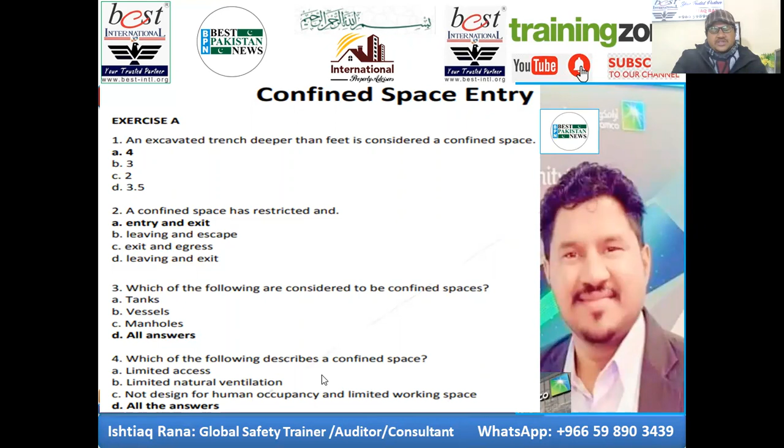Now, which of the following describes a confined space? That is the question. Limited access, limited natural ventilation, not designed for human occupancy, and limited working space. So all of the answers are correct.

Now, the atmosphere of a confined space is unacceptable if the oxygen level is below a certain percent. As per Saudi Aramco, below 20% or above 23.5%. So the normal range is 20 to 23.5%. The atmosphere of a confined space is unacceptable if oxygen is below that percentage or above that percentage.

So below 20% as per Saudi Aramco, but as per OSHA 19.5%. On the other side, as per Saudi Aramco, above 23.5% and less than 20% is not acceptable. If we still want to work, above 23.5% is not allowed because explosion and fire hazard will be there. Below 20%, of course, suffocation and chances of unconsciousness will be much higher. So it's not allowed, because oxygen is life, right? But yes, if you have certain permissions, with SCBA or self-contained breathing apparatus, or supplied air breathing apparatus, we can still work, but it requires plenty of approvals from Saudi Aramco.

Now, which of the following hazards can be found in confined spaces? There are plenty of hazards in confined spaces, but some of them are listed in the options, like temperature - I would say extreme temperature, or maybe low temperature below 0 degrees - or noise, or hazardous atmosphere. All the answers, because all three are the hazards.

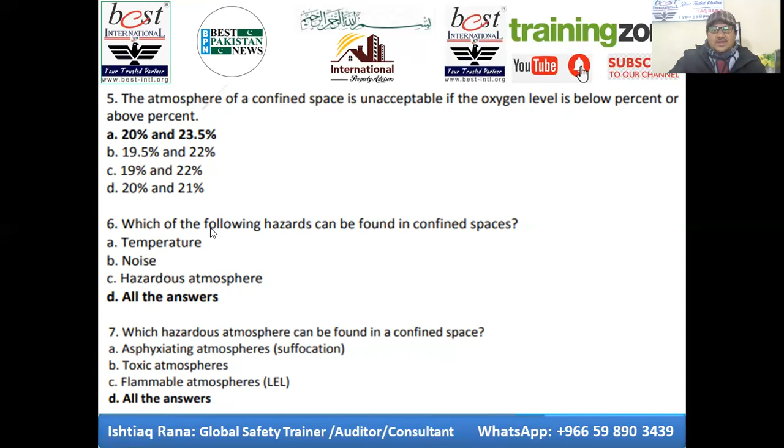And unfortunately, sometimes we don't get a second chance. That is why we have to be proactive, very, very much proactive, rather than reactive - waiting for something to happen and then taking action. Don't wait for the accidents.

Now, number 8: exhaust, diesel, or petrol fumes near a confined space may contain a hazard for a nearby confined space, of course, carbon monoxide. The air temperature in a confined space is not considered when evaluating working conditions in a confined space - false. We have to consider air temperature.

Exercise B is all about what you must have before entering a confined space within a Saudi Aramco facility or project site. You are required to have a valid confined space entry permit issued by a certified issuer, like you will be, inshallah, after passing the third-party exam and then the Aramco exam. You'll become a certified work permit receiver, and qualified work permit receiver, and then along with the Saudi Aramco issuer, you as a work permit receiver can represent your company, and both parties have to sign the permit, which I call a kind of legal agreement.

So both parties are responsible for safety. It's not like only you as a contractor are responsible. Even Saudi Aramco as a customer, they are more responsible than us, to be very honest, because we are going there to serve them, maybe for maintenance, inspection, repair, or construction projects, but ultimately we are working within their territory. So their responsibility is also there, that is why they have plenty of safety policies and procedures, with a lot of focus on safety all the time, and they motivate us to follow safety regulations.

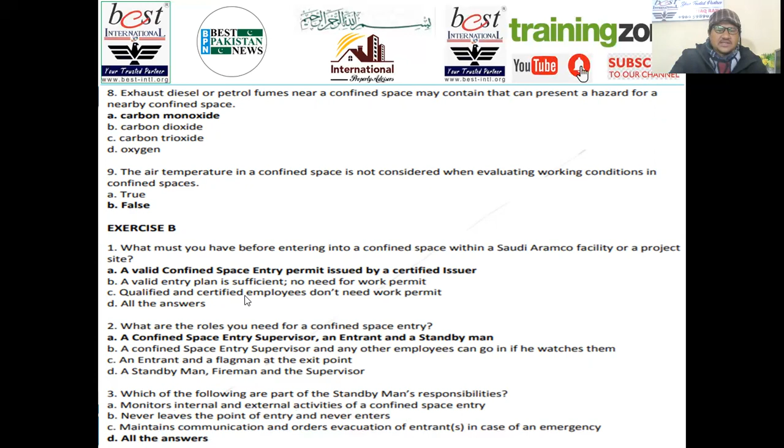Question number 4 of exercise B is, which of the following are part of the entrant's responsibilities? Again, never enter until precautions are in place, maintain communication, and alert the standby man or other entrants in case of emergency.

So all the answers are correct. Now, exercise C is more like true and false. A confined space entry permit is required for jobs when you enter a confined space - true. Vessel entry for cleaning activities in a hydrocarbon processing plant requires a confined space entry - true, because it's a restricted area, danger zone, or kind of hazardous area.

So whenever you are crossing a line of fire, of course you require a permit. Even the person who already has the permit still has to be careful of another line of fire, because the smallest mistake is all it takes, and plenty of incidents have happened and are still happening, to be very honest. You can research the last 100 years and see how many incidents or accidents have happened within restricted areas, danger zones, or especially confined space areas.

Now, a confined space entry permit ensures the proper preparation of the confined space, identification and control of hazards, the safe entry and exit of personnel, and that rescue plans are in place - true. We need all these sets of programs, documentation, and systems to be safe there.

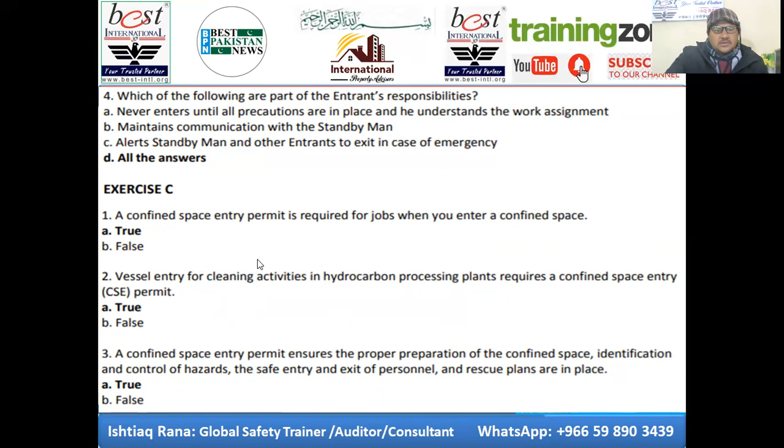Now, the confined space entry plan is the written document to isolate, depressurize, clean, drain, purge, or ventilate. So the confined space entry plan is a written program on how to disconnect all sorts of energies, depressurize all sorts of pressures - could be hydraulic, pneumatic - or cleaning, maybe water cleaning, maybe a steaming process, and draining all hazardous materials and liquids.

Purging might use nitrogen for purging, and ventilate might be natural ventilation or mechanical ventilation using a blower, or even continuous ventilation while performing any activity there. But especially when performing emergency rescue unique to a specific confined space, yes, we require procedures. So it's a game of procedures. The right option is A.

Now, during the joint site inspection, all hazards and controls are identified and recorded on the work permit form and become conditions for the confined space entry. True.

During the joint site inspection, all hazards and controls are identified. So JSI is not kind of a formality. We truly need to take it seriously, especially I'm talking to the already approved, qualified, and operationally working within Saudi Aramco, the WPRs. Please take this JSI seriously, because that is the first, single most important document where you can ensure your safety. Don't rely 100% only on Aramco safety, because your safety must be your top priority as well.

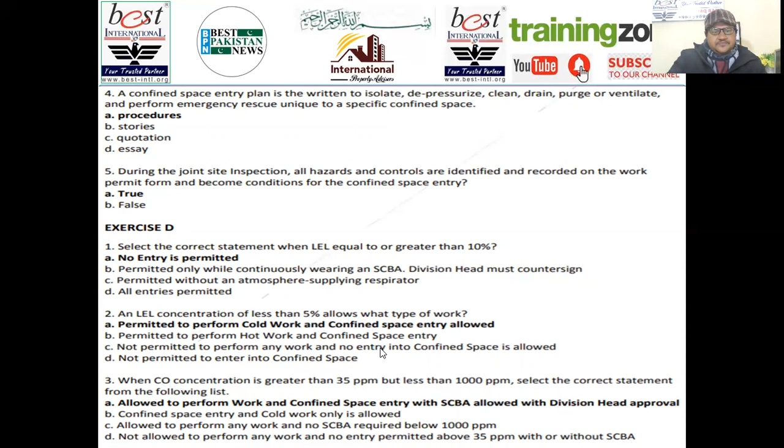No, rescue from a confined space can only be done by a trained rescue team, a trained, qualified, well-tested, validated, operationally sound trained team. The standby man must ensure all entrants sign the CSC for all confined space entry. Maybe air mover, vacuum truck, no, entry log. Entry log is important, whosoever is there.

And to be very honest, the standby man must be bold enough, the confident one. Even if the president of Saudi Aramco himself wants to go into that confined space, you are still authorized to stop him and ask why he wants to go there. I mean, he's not part of that team. If you still allow him to go inside, make sure he signs that CSC log sheet. Same way, if someone is coming from your top management, don't take any pressure. Tell them to sign their ID, name, time in, time out, and why they want to go inside. Everything must be logged inside the log sheet.

Now, ignition sources must be eliminated or controlled in a confined space. If they're present, like torch cutting, you must ensure what? Periodic gas tests are critical. When we normally do the gas tests, before issuing the permit, we require gas testing.

Before first entry, we require gas testing. After breaks, if we are coming out and going back again, we need gas testing. After every 2 hours, as per Saudi Aramco, we have to do gas testing. And sometimes, as per the nature of the project, we conduct gas testing continuously.

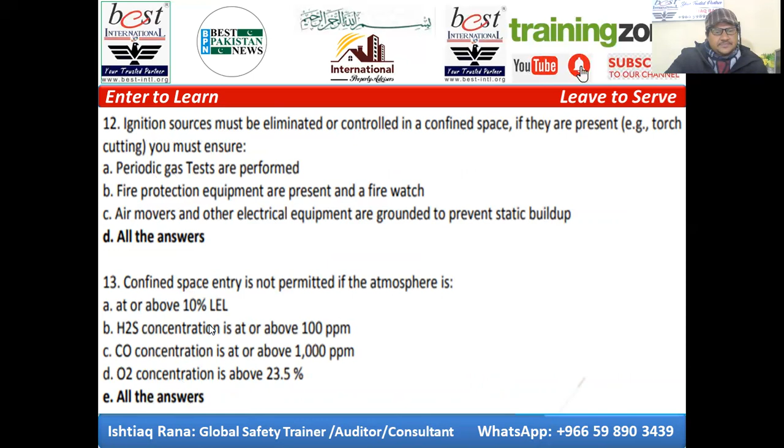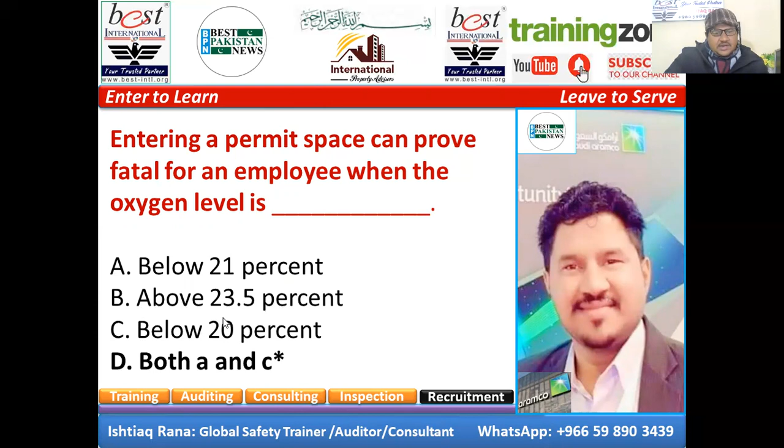Any employee can enter a permit required confined space to carry out necessary repairs or maintenance - False. Not all employees, only authorized and trained ones.

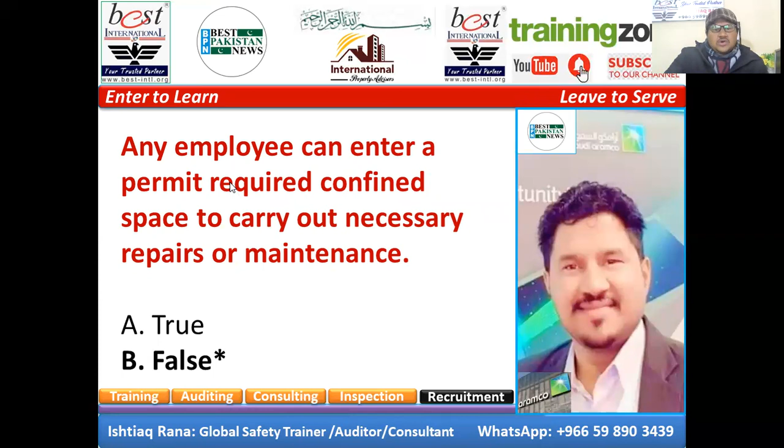Which of the following is not a confined space that requires a permit? A space that is designed for continuous employee occupancy, because a place which is not designed for continuous employee occupancy is called a confined space, and the question asks what is not a confined space. So any place designed for continuous employee occupancy.

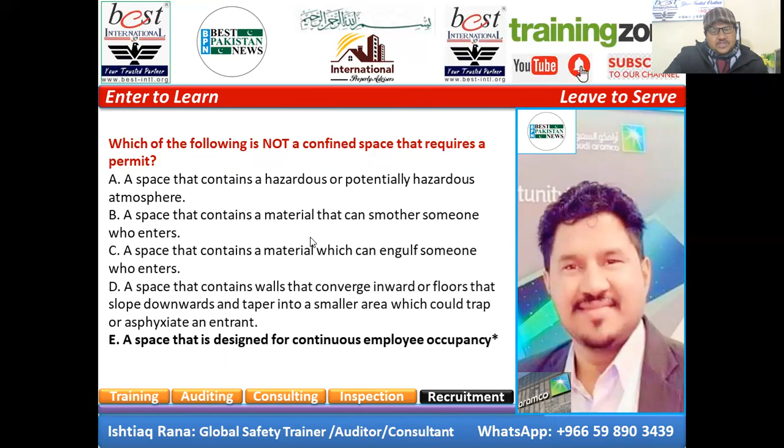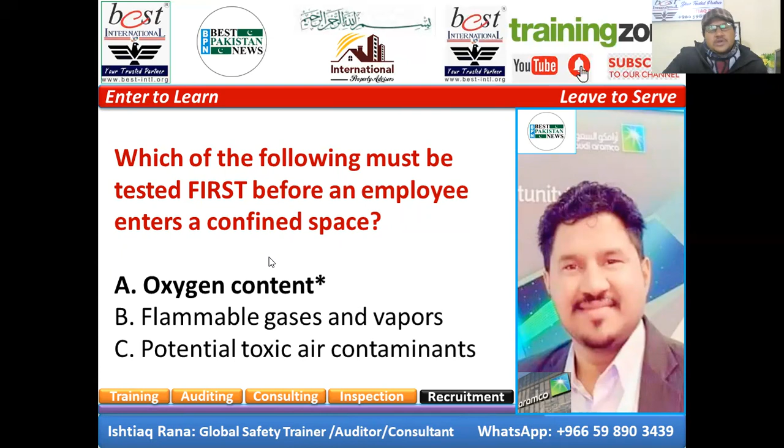Which of the following must be tested first before an employee enters? Oxygen content must be verified first of all, because as human beings our first need is oxygen, right? So make sure this is 20%, the normal range of 20 to 23.5% is what we are looking for.

What does IDLH stand for? Immediately dangerous to life or health.

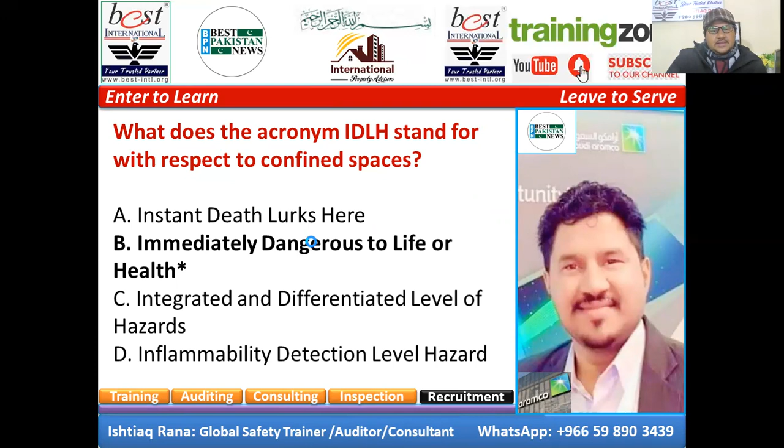Atmosphere that contains a flammable component above what percentage LEL is considered hazardous for confined space? 10%.

When you see this sign, look at the word danger and this image - you should understand that you are entering an area with a confined space.

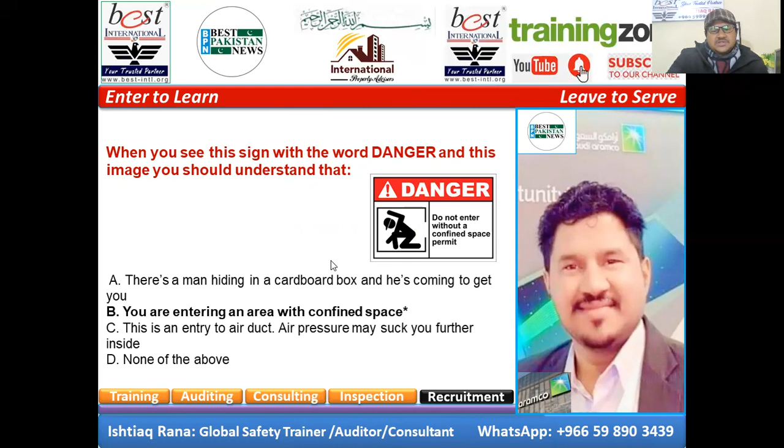At least, as per Saudi Aramco, there are 4 important elements you cannot ignore. Number 1, oxygen level.

Make sure oxygen is 20 to 23.5%, and H2S below 10 ppm, with 0 being ideal. Same way with LEL: if it's hot work, above 0% LEL, no hot work is allowed. If it's cold work, below 5% LEL, cold work is allowed without SCBA for 8 hours. But at 5 to 10% LEL, cold work is allowed only with SCBA and certain permissions from Saudi Aramco. Above 10% LEL, no entry.

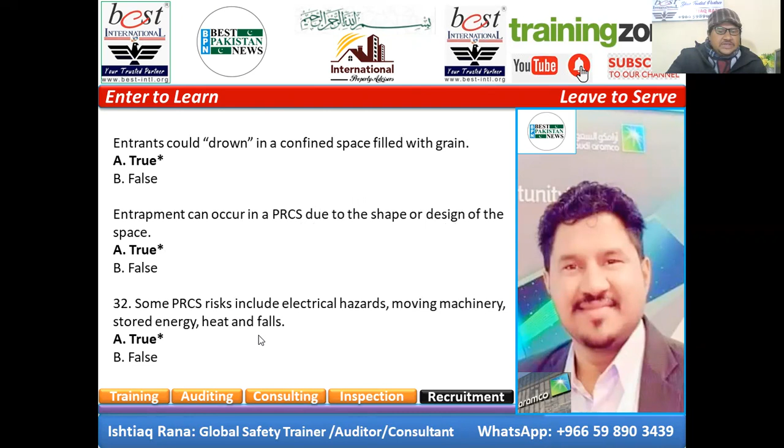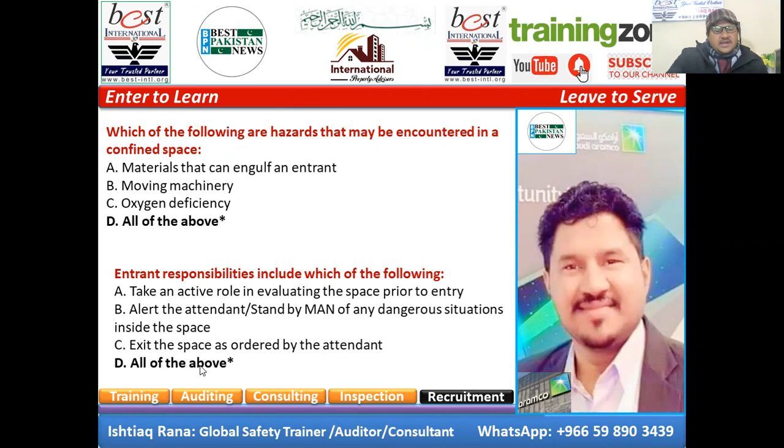Which of the following are hazards that may be encountered in a confined space? All are hazards, like material that can engulf an entrant, moving machinery, and oxygen deficiency - all of the above. Entrant responsibilities: take an active role, alert the attendant and standby man, and exit the space as ordered by the attendant. So, all of the above.

Employees must be trained prior to performing confined space entry. Yes, they must be trained.

An attendant, a standby man, may leave the area of the confined space entry for a brief period. False.

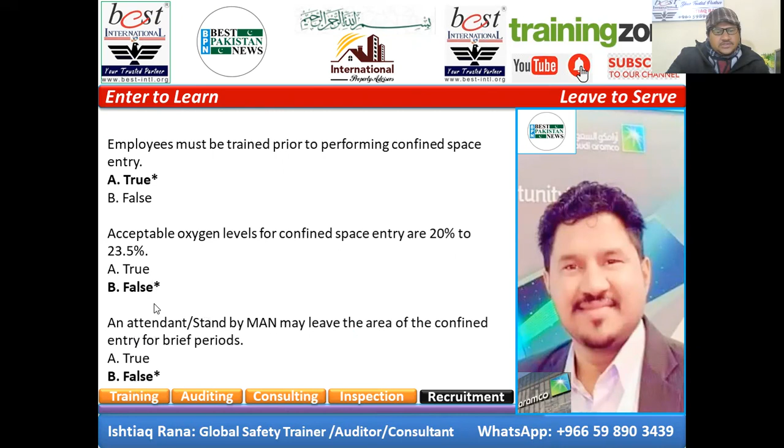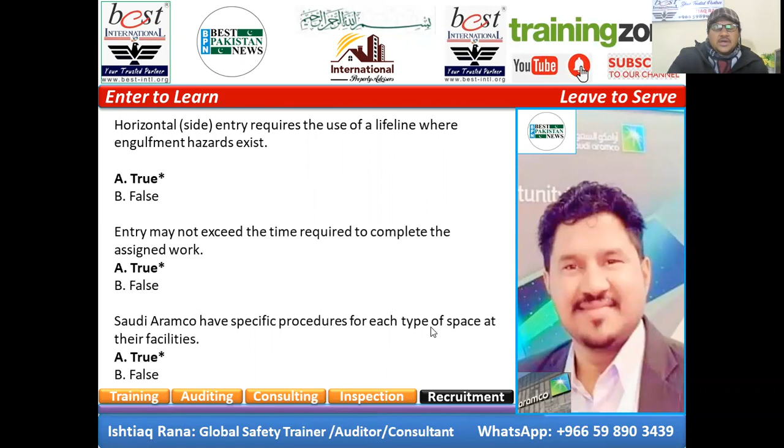Horizontal entry requires especially the lifeline where engulfment hazard is present - true. Entry may not exceed the time required to complete the assigned work - true. Saudi Aramco has specific procedures for each type of space at their facilities - true. So we need to follow Saudi Aramco regulations.

To be very honest, sometimes Saudi Aramco might require any sort of WPR if there are no confined spaces, restricted areas, prohibited areas, or danger zones - because any activity in a hazardous area requires someone fully responsible for proactively identifying hazards and controlling or eliminating them in advance before starting the activity or project. So good luck and stay safe.